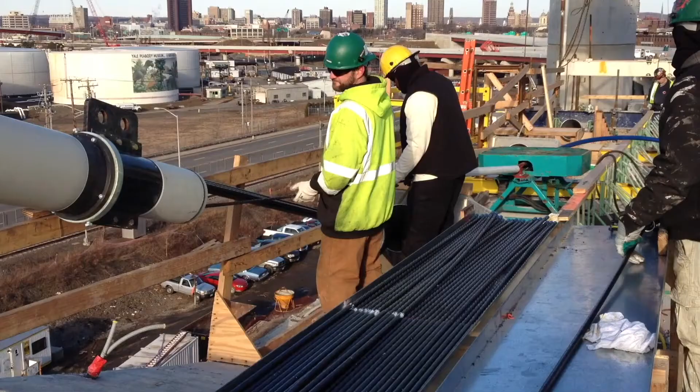Over 10,000 dedicated professionals were involved in delivering this nationally significant signature bridge and highway program. As residents of Connecticut, we should all take pride in the people and partnerships that work to build this world-class project. I hope you enjoy this fascinating account of the new Q Bridge.

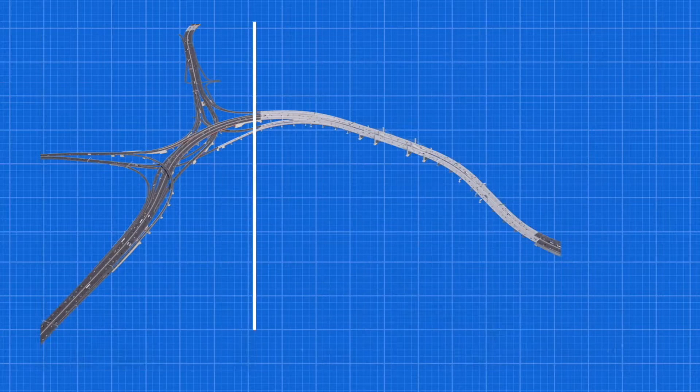This is a story about one of our country's largest, most complex transportation projects, the I-95 New Haven Harbor Crossing Corridor Improvement Program, also known as the Q Bridge Program. Spanning a generation of planning, design, and construction, the Q Bridge Program brought our nation's busiest roadway into the 21st century.

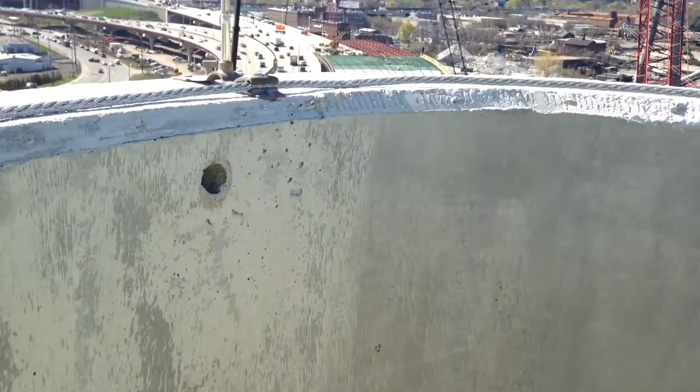The Connecticut Department of Transportation and its federal partner, the Federal Highway Administration, are pleased to offer this historical documentation of the Q Bridge program as told by the people who planned, designed, and constructed the 7.2-mile corridor, which includes the signature Pearl Harbor Memorial Bridge, the Q Bridge. Come behind the scenes and listen to how the program was designed and constructed. It is a story worth telling.

New Haven was first settled in 1638 when the only way to cross the harbor was by boat. It was a time when oystering was a thriving industry. Later, steamboats transported people from New Haven to New York. As the city grew, two bridges were built, one that crossed the Mill River on Chapel Street and another that crossed the Quinnipiac River on Ferry Street.

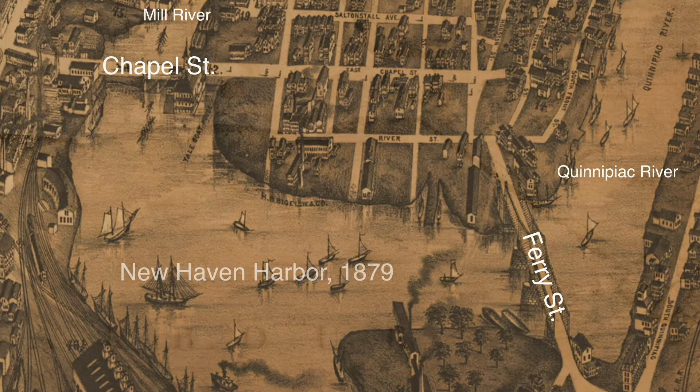Eventually, the first Tomlinson Bridge was built across the harbor in 1797. The present-day Tomlinson Lift Bridge serves U.S. Route 1 and is actually the fourth iteration of this crossing.

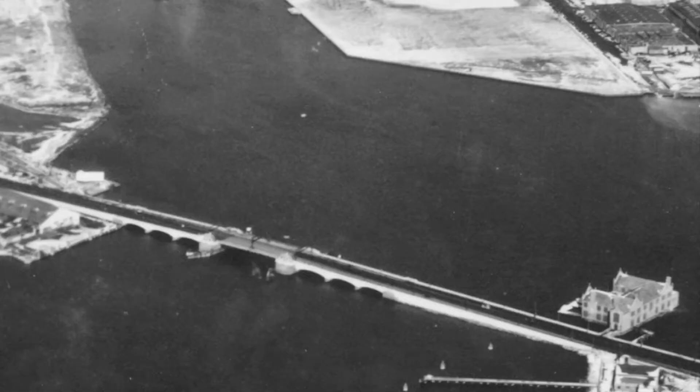After World War II, President Dwight D. Eisenhower was convinced that a national system of roads for automobile and truck transit was necessary for national security as well as for the economic growth of the United States. On June 29, 1956, he authorized the Federal Aid Highway Act, and so began the construction of the interstate highway system as we know it today.

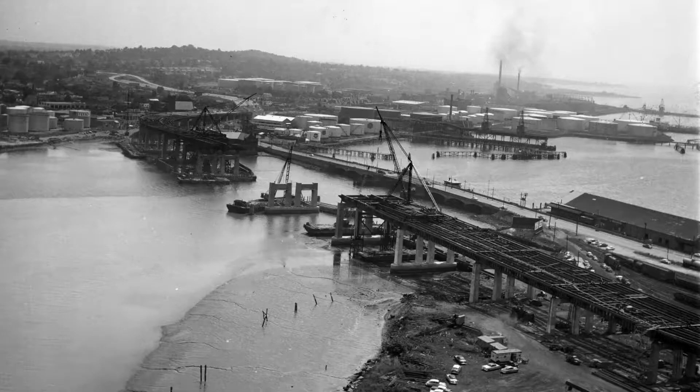2 years later, in 1958, the original Quinnipiac River Bridge was completed, carrying 3 lanes of traffic in each direction across New Haven Harbor. At the time of its completion, it was one of the longest steel plate girder bridges in the nation. With an expected lifespan of 50 years and a design capacity of 40,000 vehicles per day, the original bridge was considered a marvel.

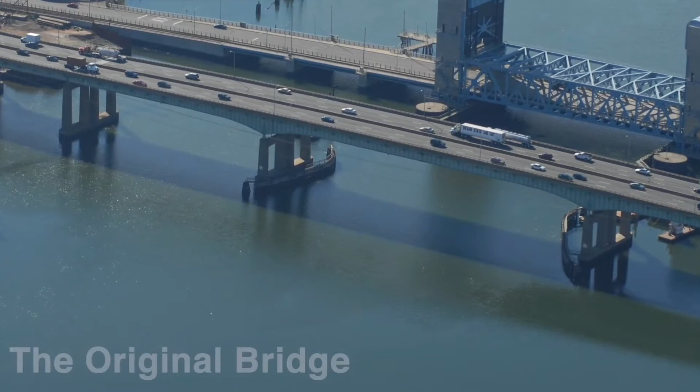However, by the mid-1990s, when the bridge carried over 140,000 vehicles per day, more than 3 times the volume for which it was designed, the Connecticut Department of Transportation took steps to repair or to replace the original bridge. During that time, the Q Bridge was costing more and more money to maintain in a state of good repair. The bridge was old, it was carrying much more traffic than it was ever intended to. We kept having to do projects to repair it.

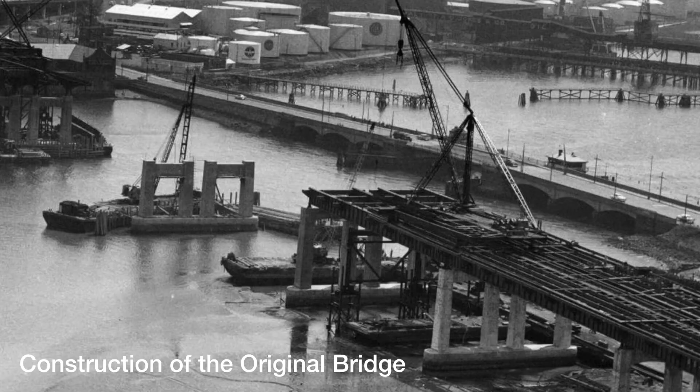The previous bridge, as I understand it, was actually a record setter for its type in the country when it was built. So it was a pretty significant achievement. It lasted a long time. It was too narrow, and it was falling apart. It was just over capacity towards the end and deteriorated to the point where we had multiple emergency repairs that had to be performed. Technical term was structurally deficient and functionally obsolete.

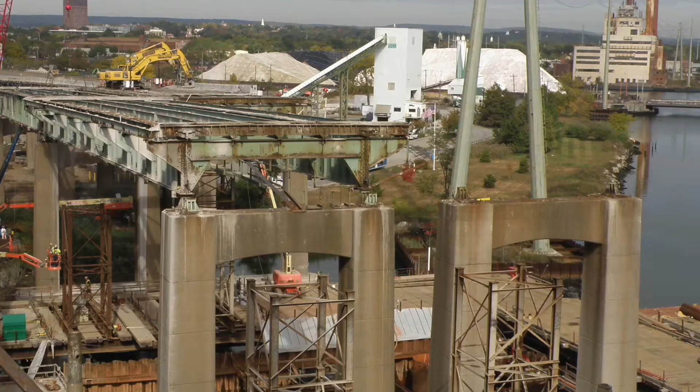So we needed to look at either a replacement or a long-term repair for the bridge, and the decision was ultimately made to replace the bridge. It had to be removed in a very specific sequential order. The contractor hired an engineer to design a demolition plan, and that had to be closely followed.

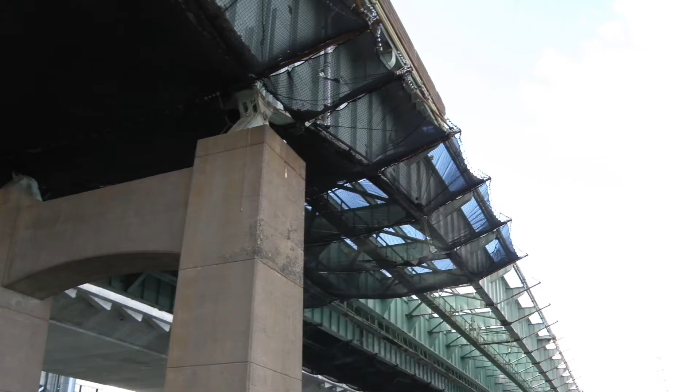We had to perform the demolition in accordance with all the environmental permits from the Department of Energy and Environmental Protection, from the Army Corps of Engineers, to make sure that we weren't dropping material down into the waterway. We had to hang nets underneath to catch anything. We had to coordinate very closely with the U.S. Coast Guard because it's a navigable waterway.

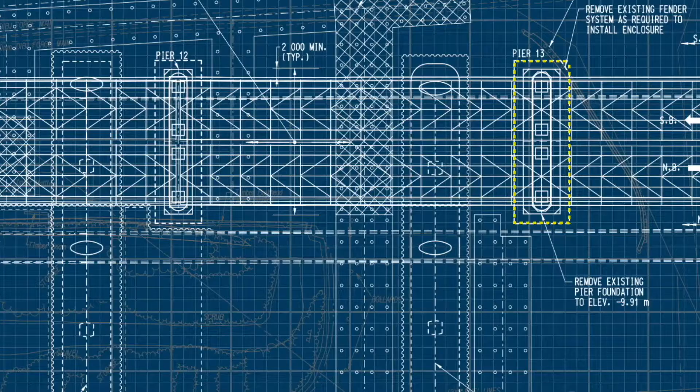We had to keep the channel open. There were a couple of times when we removed the steel over the channel where we had to close the channel for safety reasons. There was one pier, pier number 13, that had to be removed to a significant depth below the waterway because of a widened channel, and that had to be blasted out of the water.

It was important to the city that a signature bridge be built in New Haven. To the casual observer, the Q Bridge is probably the largest architectural feature that you can see in the city of New Haven. When the department was considering what type of structure to put in, the city of New Haven weighed in. They were pretty adamant that they wanted to have a significant bridge, something that was recognizable.

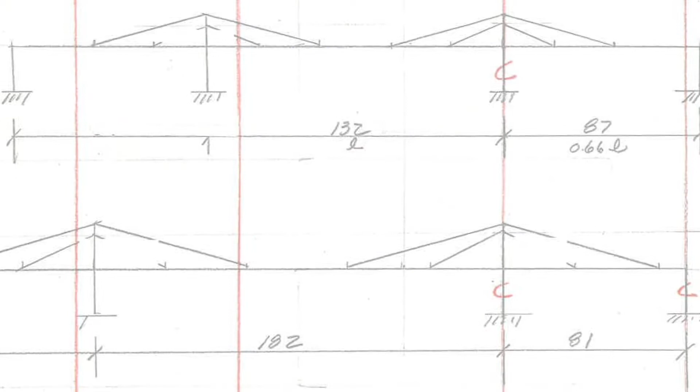The job itself started in 2001, and I was part of the project during the design phase. To be honest, these jobs start out with a white sheet of paper. We had to put a new bridge on top of an old bridge in the same footprint and keep 3 lanes of traffic in each direction. So that was the fundamental challenge of this project.

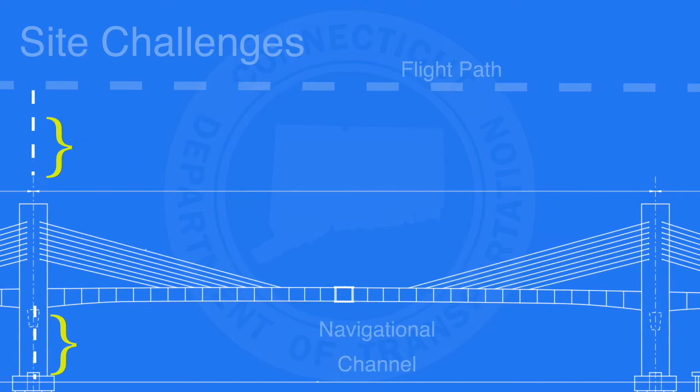There were some challenges to the site. New Haven Harbor is a busy place. There's a navigational channel down below. Certainly need to keep minimum clearances for that. So the bridge depth or the girder depth couldn't go too deep. The elevation of the highway had to be maintained at the midpoint of the bridge. And there's a nearby airport, Tweed New Haven.

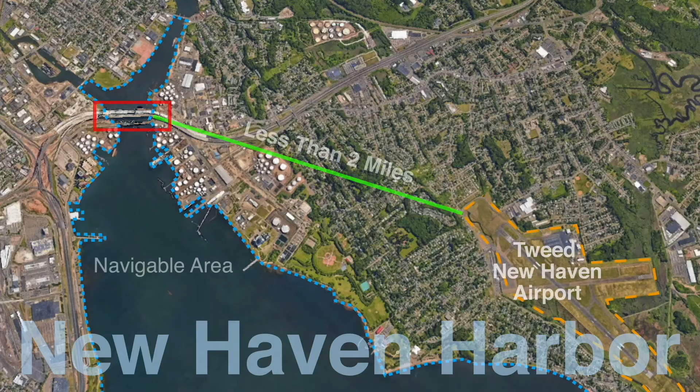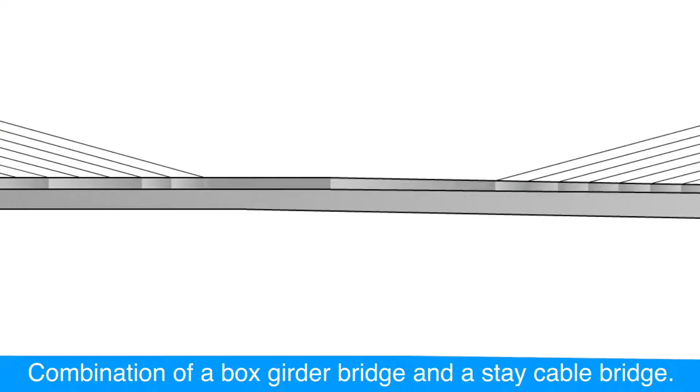So between trying to not go too deep into the navigational channel and not raise the profile of the bridge too much, the designer looked at what they call an extradosed bridge, which was fairly common in Japan at the time. And what basically happened is it pointed towards this new technology of an extradosed bridge that could combine a medium span bridge with a short tower and fit in this thread-the-needle footprint that we had to deal with. We decided on what we call balanced cantilever cast-in-place construction with the form traveler. It's a relatively rare structure type, although it's becoming more and more common.

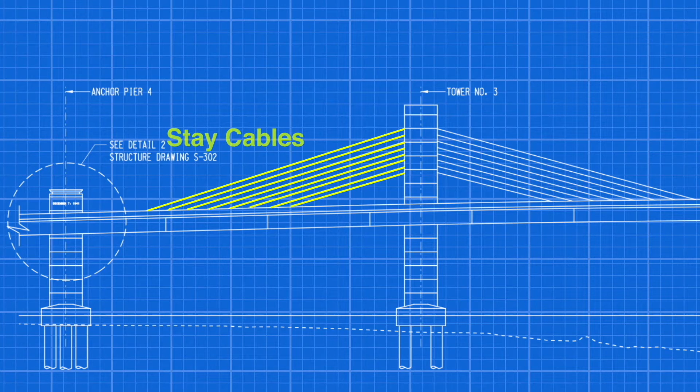Instead of all the load being taken up by the cables, which happens on a cable-stayed bridge, live load is taken by the cables and the dead load is taken by the rest of the superstructure. Basically, it's a hybrid of a stay-cabled structure and a traditional segmental box girder structure, but the towers are shorter, so therefore the stays themselves are flatter, so it's more of an external post-tensioning, but that's the very definition of an extradosed bridge, is to have that inclination of the stays be flat.

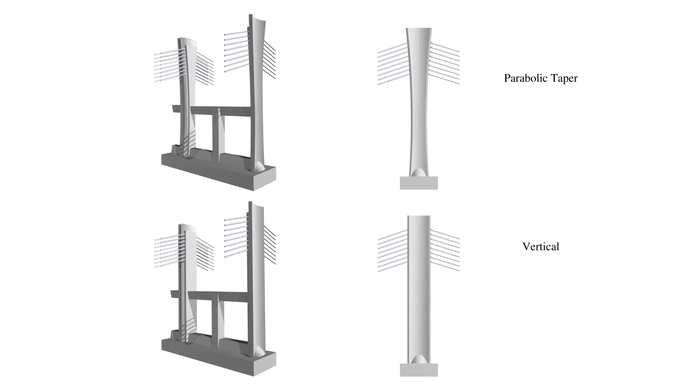This meeting was going to be really important, so I said I'm going to take these hand sketches that I had done and present it to the broad audience. We were kind of confident they liked what we were presenting, and we got a resounding yes to design 2 bridges, concrete and steel, to put out to bid. We recognized that because the fatigue cycles were less, we could raise the allowable stresses in the cable to a higher level, and that has now been adopted by current codes.

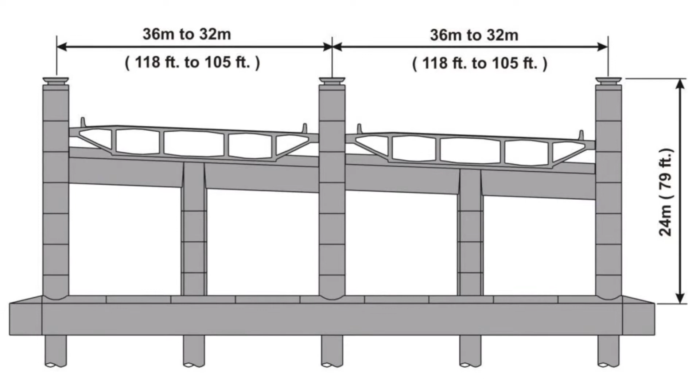Decision was made, yes, we're going to go with an extradosed cable-stayed bridge, and we proceeded with the final design and to build the bridge. I couldn't imagine any other bridge there right now. It just fits.

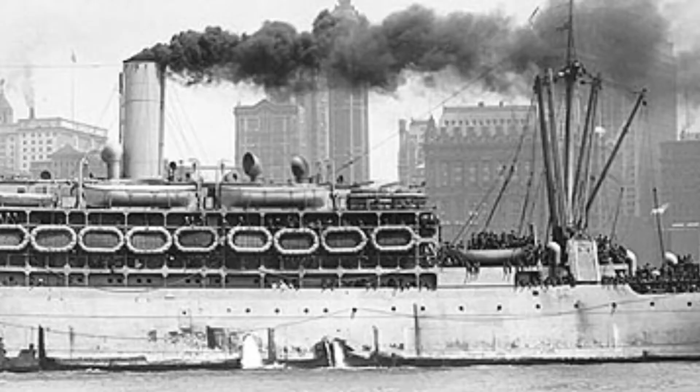It was decided that we wanted this really dignified approach, which is called the anchor pier, but we wanted it to be a monumental approach so that if you're coming from either direction, you know you're hitting something special. It's kind of reminiscent of the ship smokestack, and it gained traction, and I know ovals are hard to build for the contractor. So I developed an oval, but it's really a compound curve made up of 2 circles at the end and 2 circles that connect it. And you can really reinforce those ends really nicely and get good seismic strain.

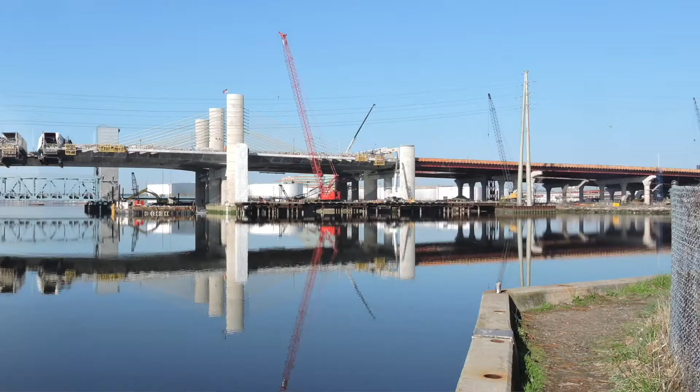The Connecticut State Legislature designated the bridge as the Pearl Harbor Memorial Bridge. The cables, as they come down, sort of look like sails of ships in a way, so it has sort of a nautical theme to it. When you have a nautical theme like Pearl Harbor, you tend to gravitate towards things that are ship related.

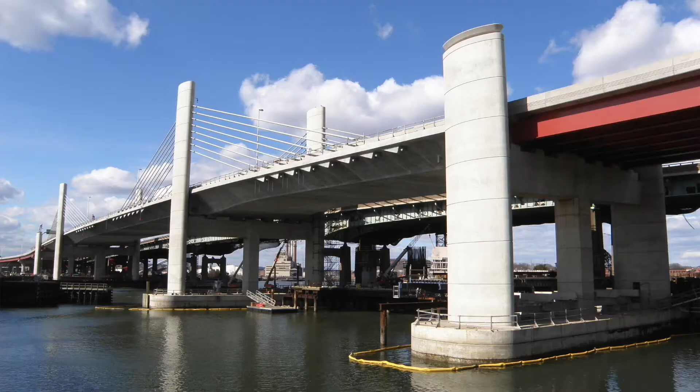Another thing, if you look at the bridge closely, you'll see these reveal lines up and down the tower legs, and if you didn't put those in, it would look too massive and stark. So those really create relief to the eye and kind of make it on a more human scale.

The state of Connecticut wanted to recognize the service of the veterans. My dad was a World War II veteran and landed at Normandy, so I felt kind of a closeness to that ideal. We even went in terms of the size of the lettering. So that captured what we were trying to present.

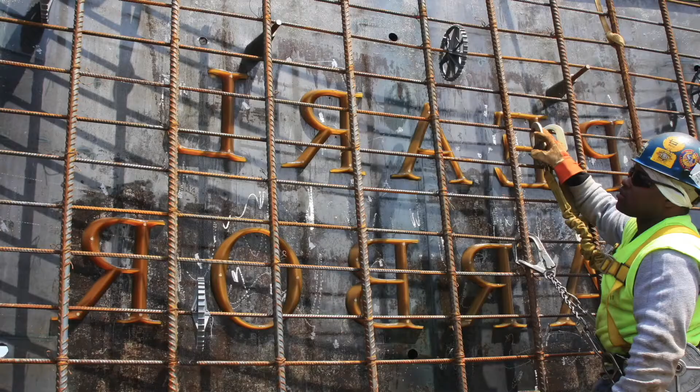The coordination necessary to deliver a bridge of this type with an adjacent highway-to-highway interchange presented a tremendous amount of complexities. Reconfiguring and redesigning the interchange was really key to the success of improving transportation throughout this corridor. The interchange next to it has 200,000 cars. If we didn't have to maintain safe travel for all those cars every day, we could build this project much faster. And of course, the impact of that is it took more time.

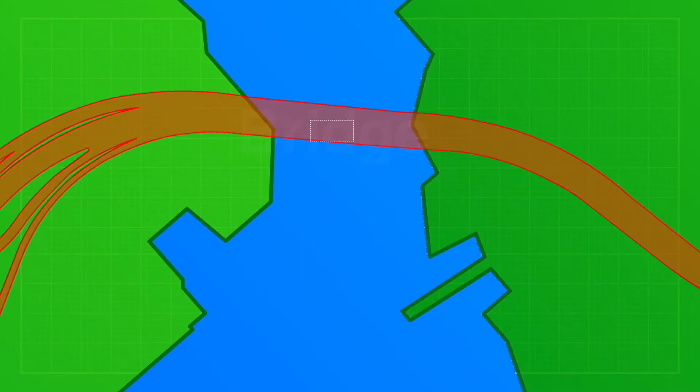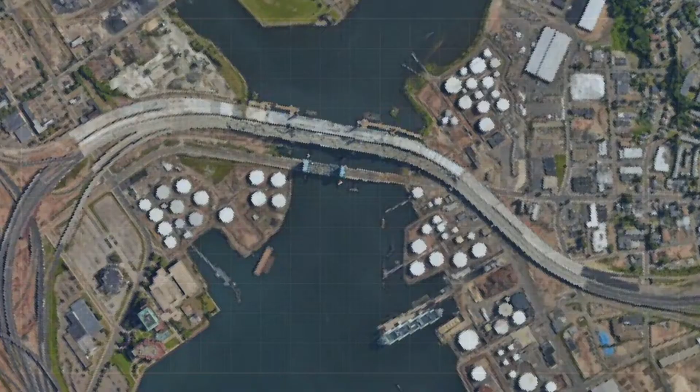So you didn't really see any traffic flow betterment at all during the approach work as much as you did once the Q Bridge and interchange was done. That interchange is what received all the vehicles coming off and going onto that Q Bridge into an interchange highway system. So the approaches on the west side had to be done concurrently with the approaches on the Q Bridge. We need to build the bridge without being in the same footprint of the existing bridge, so we need to keep the foundations away from the existing ones.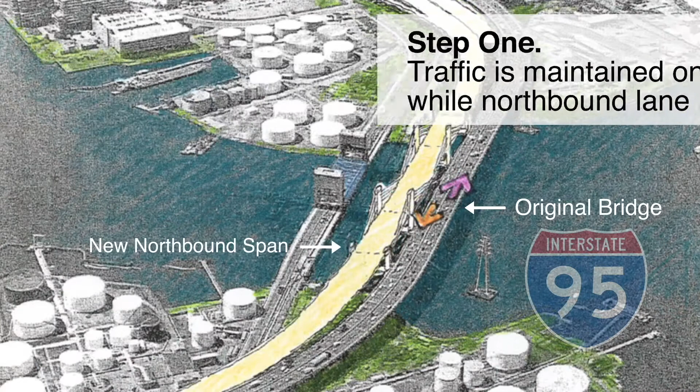So all of those sort of factors weighed in as the design developed and they settled in on the extradosed concept. It was really maintaining existing lanes all the time during high peak hours, and the challenge was to figure out how to get everything built while maintaining those existing lanes, and then have that all work from what we had determined in our construction staging to say that, okay, we laid that out and we could actually see it all happen from up there. It was really, really great.

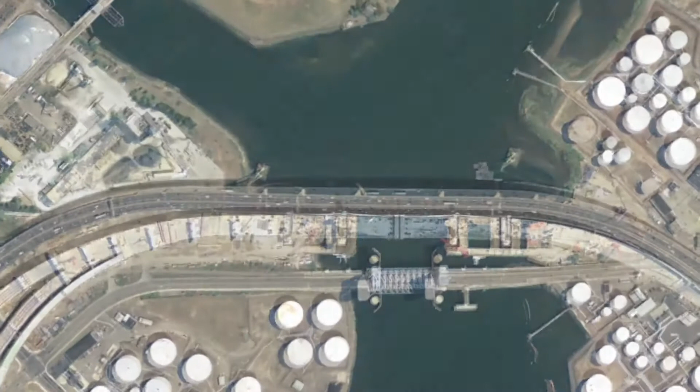We were introduced to the 4D model during the design phase of the interchange project. It's basically a 3D model that you put the element of time and schedule to, which creates a 4D element or product. And we thought, what better place to use it than the interchange? It was a very complicated project as far as staging, reconstructing an interchange within the footprint of an existing interchange. So we thought this 3D, 4D modeling would be really beneficial.

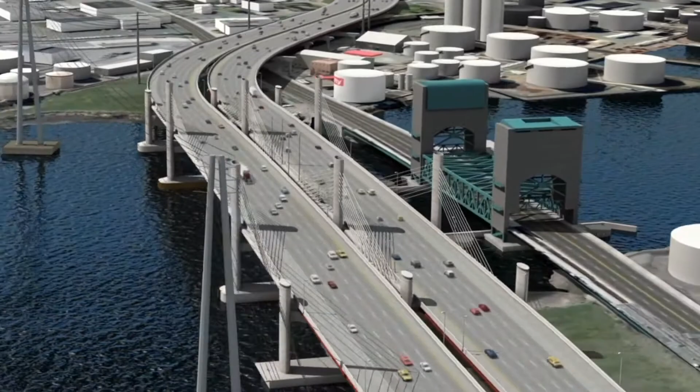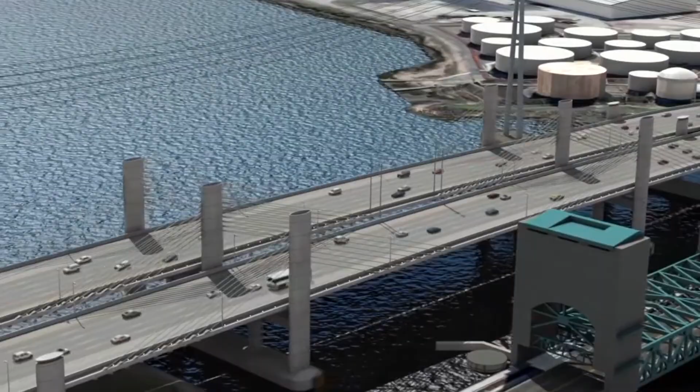We introduced it at a mandatory pre-bid conference, and we introduced this modeling program which showed how the department saw this project getting built. And we also notified the contractor that we would make this model available to the project team. I think we had identified 8 additional conflicts that we didn't see during the design phase for the interchange that we did identify once we put this model into place. So right there we saw the benefit.

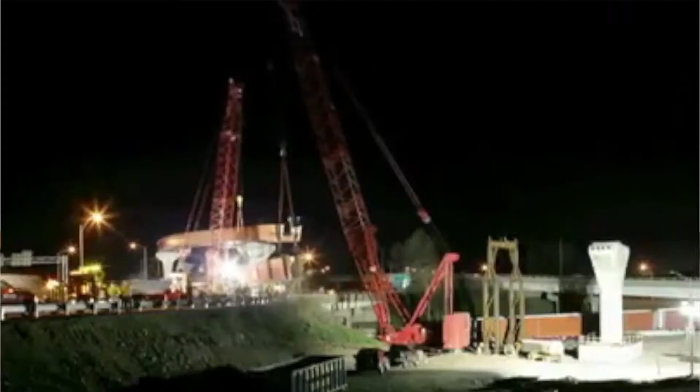And the first time we used it was during the flyover structure that we put in contract E2, where we had to stop traffic on 95 and 91 in order to erect these tub girders. We had 20-minute stoppages to do this, and we used it to capture how it would flow minute by minute. Once the project was underway, we introduced it to the contractor a little at a time, and every time they would have an idea, we'd say, well, let's put it to the model and see how it reacts in the modeling program. And we're like, you know what, maybe this is kind of a beneficial program, and we used it quite a bit after that.

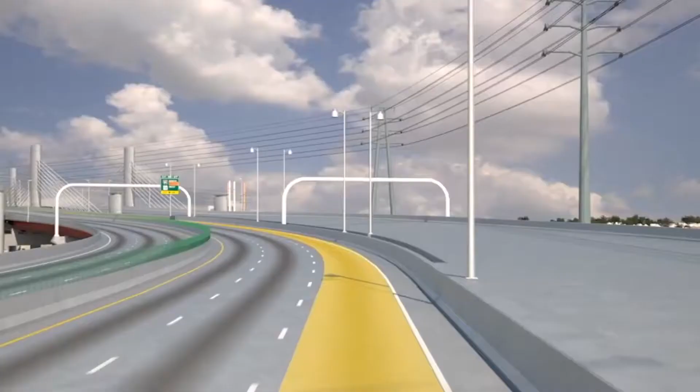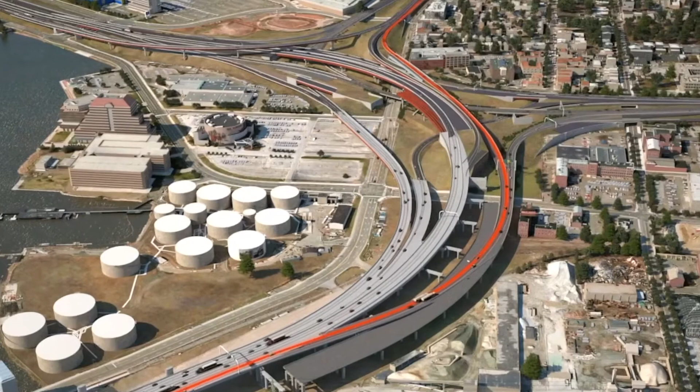There was a structure that we had to demolish 18 inches away from an existing historical building. We used the modeling program and combined it with scanning to try and identify conflicts, and it worked out really well. But we also use it heavily with our public information relations. DOT has some animation to show you what this is going to be like when it's over on Saturday morning. We have it as part of our presentations. We use it on the website to show people stage shifts and things like that.

But when you put a visualization type of model to it and show what the shift is going to be, it really gets the traveling public to get a better idea of what's happening.

Workers broke ground for the Pearl Harbor Memorial Bridge main span in 2010, building on a foundation system begun in 2008 under a separate project. From the beginning, the construction program demanded the highest level of professional cooperation and creativity from many public and private sector contributors. We worked off of temporary trestles, so you had to design those trestles to withstand the loads of this very large and heavy construction equipment.

The main span is about 515 feet across the channel, so we couldn't interfere with any of the channels because of the navigation. But between the shoreline and the tower pier, that's not a navigational area, so trestles were necessary between the shoreline and the tower piers.

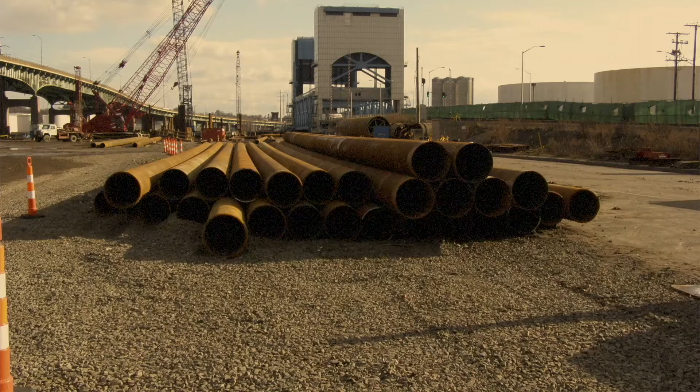The trestle was founded on 24-inch pipe piles that were driven down to bedrock. Bedrock widely varied from one side of the channel to the other. It was only 40 feet or so down on the east side of the channel, whereas it was about 180 feet down on the west side of the channel, so it really dropped off significantly. So the pipe piles were then driven to bedrock.

There was a girder steel superstructure that was built on top of the pipe piles, and then timber decking went on top of that. The contractor used concrete decking at heavy lift areas and turn areas of the trestle.

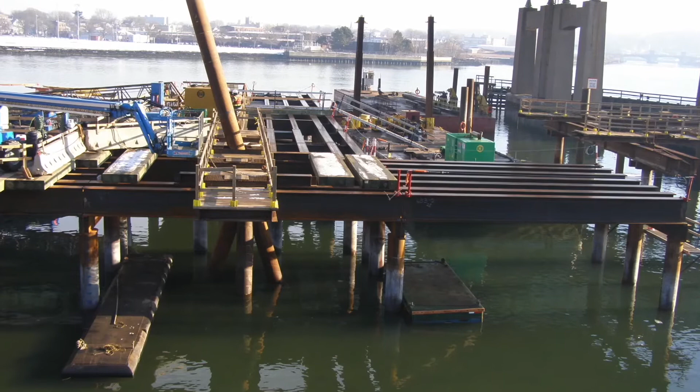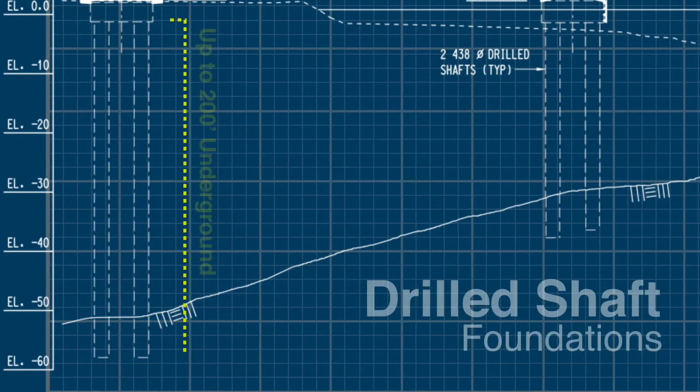The foundation or the supporting structure of the bridge is based on drilled shafts. And a drilled shaft is a circular column of concrete that is socketed into the rock below. And so that force from the bridge transfers from all the way down in the towers into the foundation to the rock below.

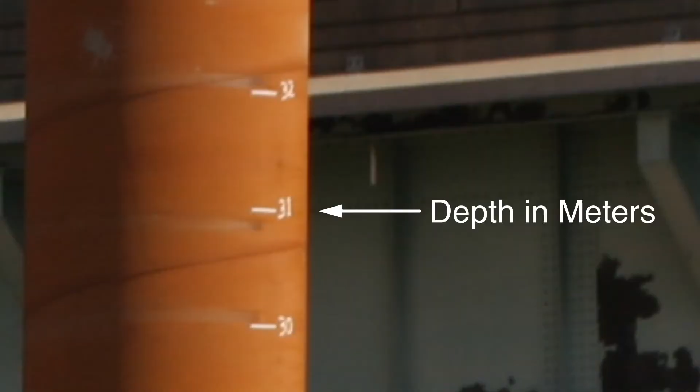In particular, we used something called an oscillator. What an oscillator does, it takes a steel tube, which is our steel casing, that becomes the form, if you will, for the drilled shaft, and that rotates back and forth, not fully in a circle, but oscillates back and forth and basically screws that tube into the rock below. And then it will excavate out to the rock, to solid rock.

And then what we would do is fill up that steel casing with concrete and reinforcing steel, and that would form our drilled shafts. You're digging out what are called drilled shafts, which are basically reinforced concrete piers that go down all the way into the bedrock.

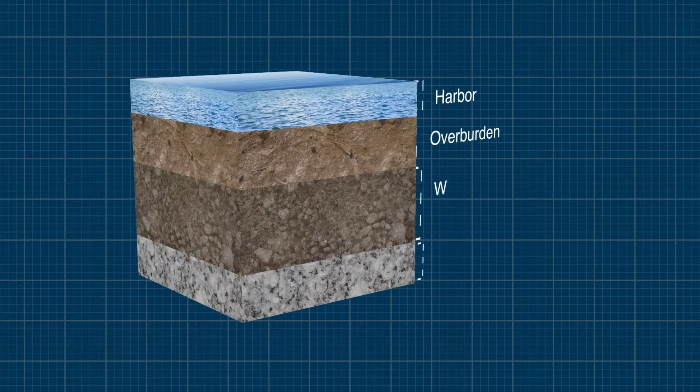So they determine the elevation of what we call weathered rock and then competent rock. And then that information is brought to the designers, so then they determine where competent rock begins and how far you have to drill the drilled shaft casing. Some of the foundations are as deep as 200 feet down below ground level.

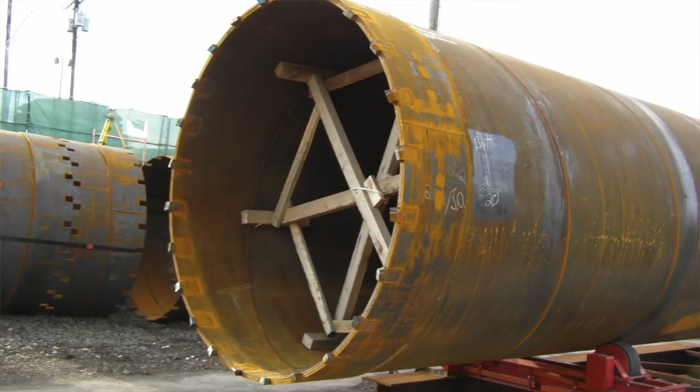We have special drilling equipment that sits on temporary supports. You can't really see what you're doing because you're down underneath the water. That can be a very challenging process. We had a sleeve of steel that was 3/4 of an inch thick, that every time they would auger out, that casing would follow through into the hole.

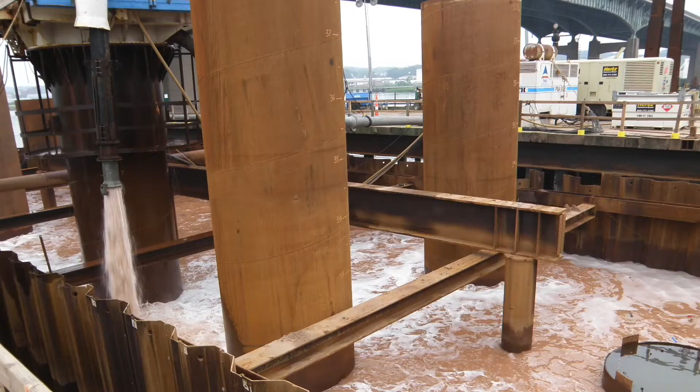Then you have to seat it into rock to make sure you don't get any washouts. And then you bring different equipment in to excavate the rock socket. The rock socket goes anywhere from 10 to 30 feet down into bedrock. Different types of equipment were used with that, some with water pressure, some with hydraulic energy to make that happen.

Once the rock socket is put into place, it has to be totally clean so you get a bond between the concrete and the rock. They use various methods to clean it out to make sure it's perfectly clean before you proceed any further.

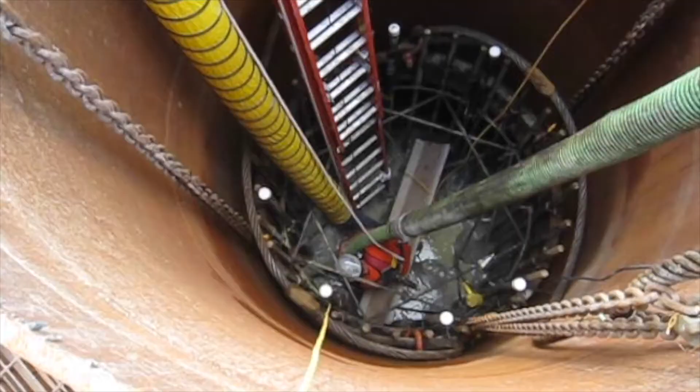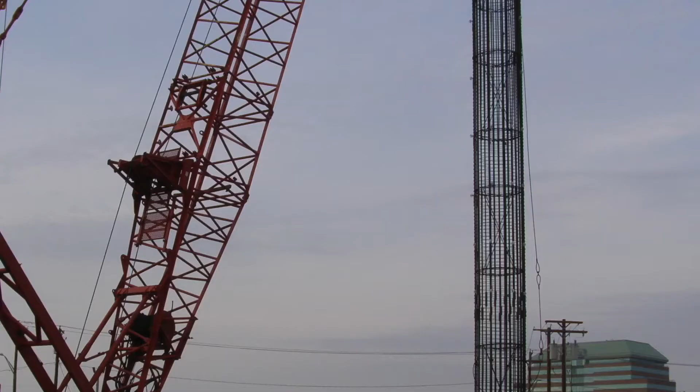You have a prefabricated rebar cage. The rebar cage has CSL tubes. CSL is for crosshole sonic logging to check the integrity of the shaft after it's poured. After you put the rebar cage in, then you do underwater concrete. It's a tremie method of pouring concrete, where you start at the bottom, you pour the concrete in the water, and you proceed upwards. So we did that with all the shafts on the entire project.

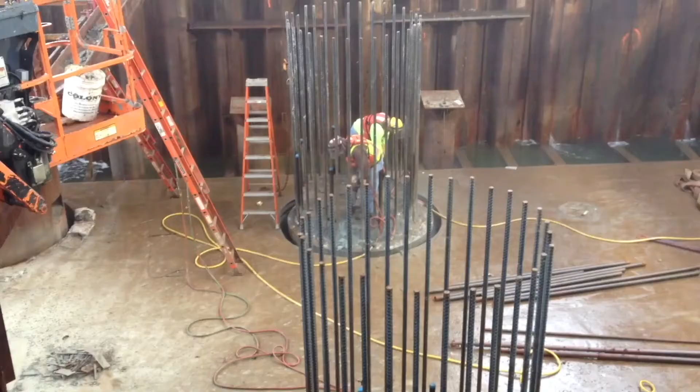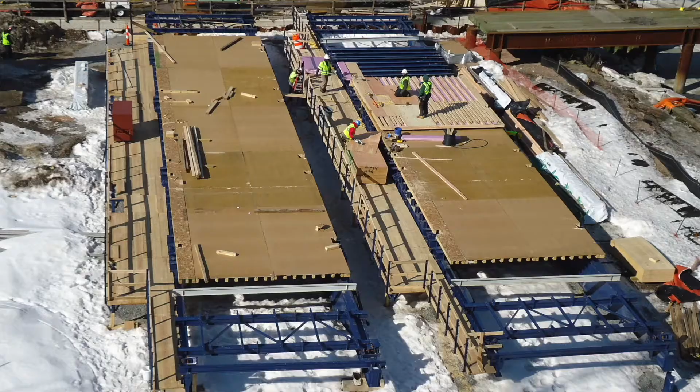At the top of the tower piers, the first segment on each side of the tower pier are built under traditional construction methods, and they serve as a platform for the rest of the work. So first you build the pier tables at the top of the tower piers, and then the form travelers can be used. And a pier table was a very large piece of concrete, about 40 feet long, and that allowed us to start as a starting point for the cantilever process.

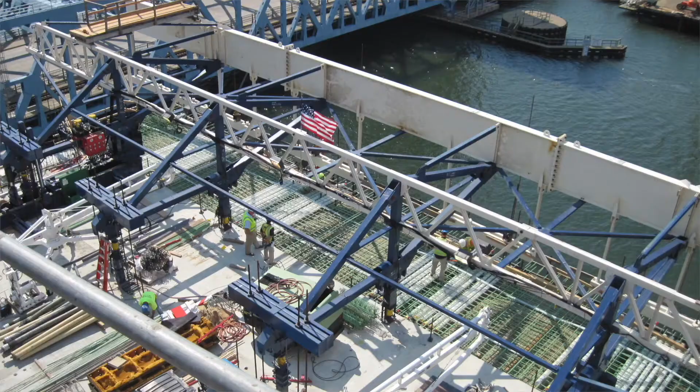Because we had a concrete segmental bridge and it was cast in place as opposed to a precast, form travelers were the conventional method that most of the contracting community would use to build a segmental bridge. We had 4 form traveler assemblies being used concurrently, so there's 2 at each tower pier. So what you do is you proceed out from the tower pier with 1 form traveler towards the middle, and then the next pour will be towards the back or towards the anchor pier.

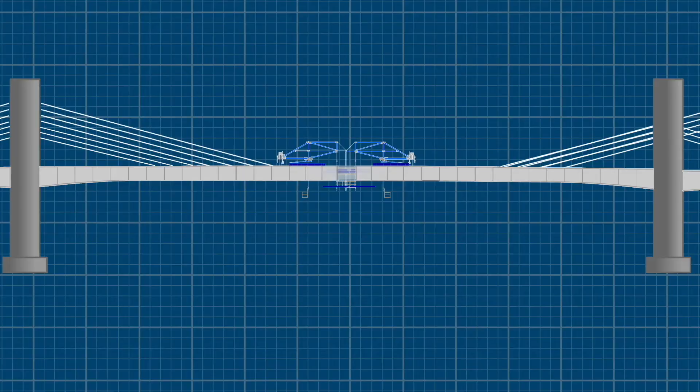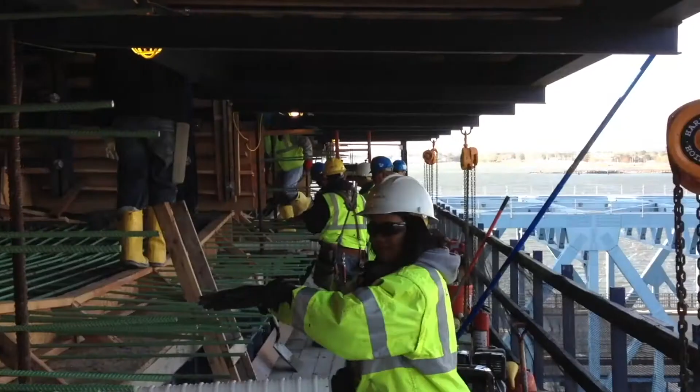Form travelers enabled us to pour about a 14-foot long section of superstructure at one time. It's a series of trusses and steel frames that basically is a formwork and supporting structure for the wet concrete. So as we had cast these segments up in the air, this form traveler would hold the wet concrete and be anchored to the previously hardened concrete.

It's a constant process. So every time we pour a new segment, we're checking before the pour, we're checking the geometry after the pour, we're comparing notes with the contractor to make sure they're getting the same numbers that we are. And it's just a constant, ongoing process the entire time. And as you get closer and closer, it gets a little nerve-wracking because you want to make sure that you're coming into the right spot. And sometimes the bridge doesn't behave quite like the computer models say.

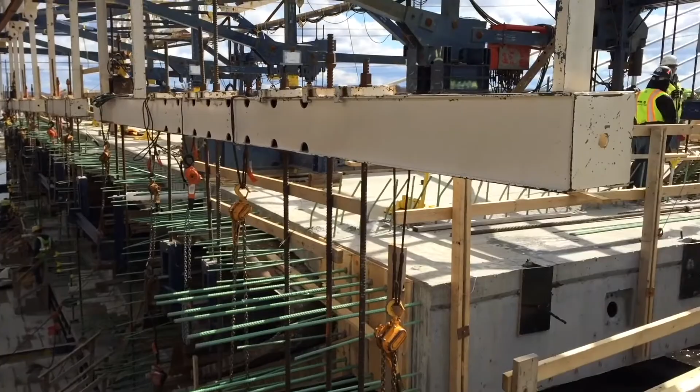We're always checking geometry to make sure it's headed straight and it's at the right deflection. We were within 1 to 2 inches in elevation of where we needed to be when we did that, which is very easy to make up. So it was very successful in that regard.

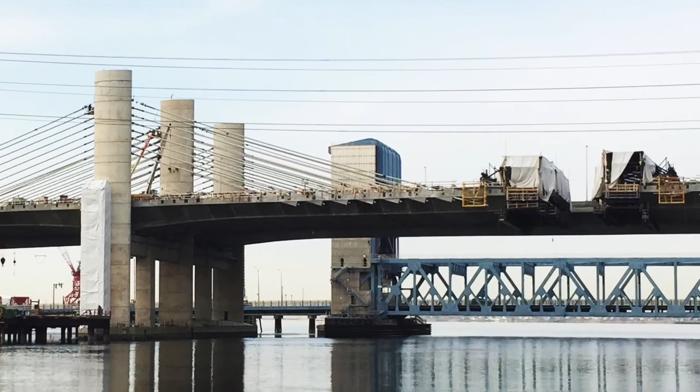And the trick is that every time you cast another piece of the bridge, another segment, you have to make sure that the geometry of that overall length of those cantilevers and the geometry of the next segment that you're placing is such that when you end up coming together with the cantilevers from the other side of the river, that they meet in the middle properly. In the end, when you come in close like you were expecting to, that's a great feeling.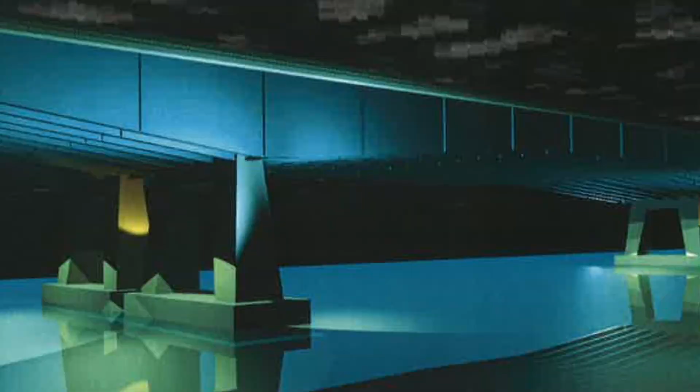When this bridge was designed back in the early 2000s, we knew that we were going to have a signature bridge. We had decided on using aesthetic lighting to light up the towers, light up the cables. Pretty common in a lot of large bridge structures. And the key benefit of going with LED lights is you can change the colors. So the original stakeholder group did have some concerns with changing colors on a memorial bridge.

Birds could fly around the bridge because they're attracted to large amounts of light. So from an environmental standpoint, they thought that using the color would be a better option and we could use softer hues during the migratory bird season. The LEDs, I think, really showcase it based on some of the feedback that we've gotten from the public to date. They really appreciate being able to kind of change it up, use some red, white, and blue on July 4th or that kind of thing, and I think that people really enjoy it.

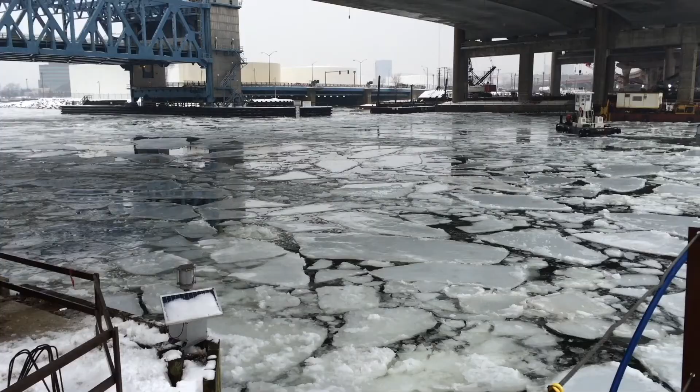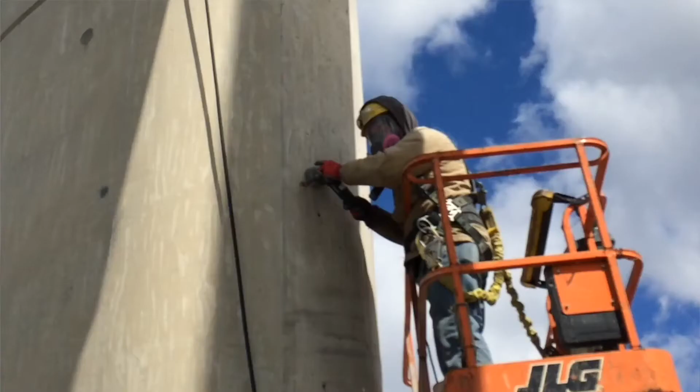You've got people that are working out there in all kinds of weather. I mean, from freezing cold New England winters to hot and humid summers and everything in between. Sometimes it's windy and sometimes it's raining. And well, I think it was a real collaborative effort between all the parties involved. Certainly the Department of Transportation took the lead on that. They had to keep plugging away day or night through all the months of the year, through the winter months, and we had some really rough winters during that time frame.

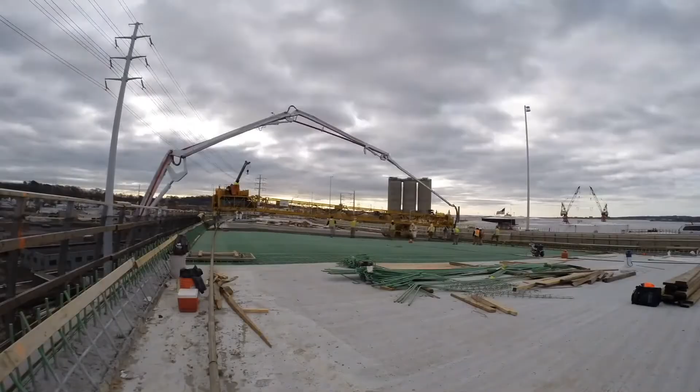It's a very big sense of accomplishment. This job is a very big success from the perspective of everyone working as a team. And again, that could come across as a cliche sometimes, but everyone worked together for one common goal. Everybody out there takes a lot of pride in what they're doing.

So, whether you're a laborer, whether you're an iron worker, you're an engineer, an inspector, I mean, all the way up and down the whole range, you've got people out there that feel like this is an important project, they understand that, and they put a lot of time and effort into it. So the work ethic is pretty amazing.

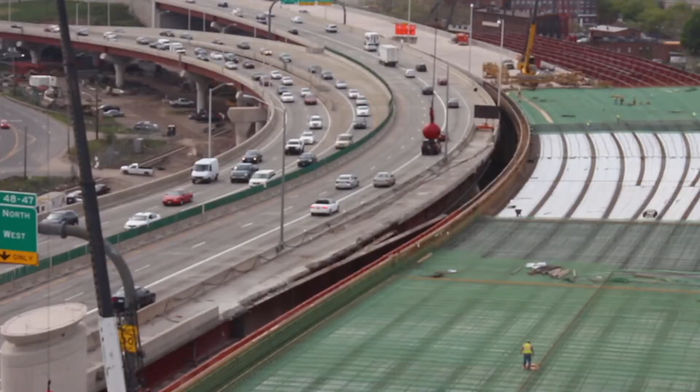We can always come back and drive across the structure and say, hey, I had a hand in that, or we built that. We got the bridge open when we said we were going to get it open. We met or exceeded all project milestones as far as the opening of the northbound bridge, the opening of different ramps, the opening of the southbound bridge. And we were able to do that while keeping under the project budget, which is really quite an accomplishment. So that certainly is something to be very proud of.

When you saw the way things were coming together, it made you even more proud that we were doing a good job. It's extremely gratifying to see a project that you worked on during design development, then you helped oversee it through construction, and now as we near completion, it's extremely gratifying.

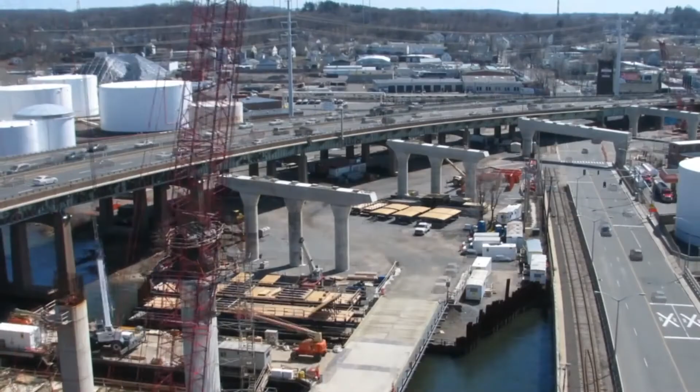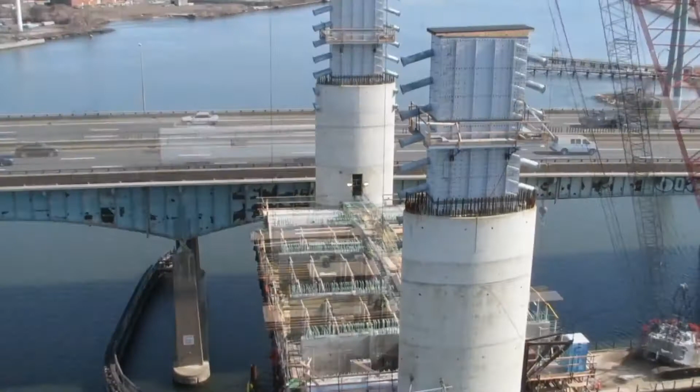We did a project of this size and magnitude and notoriety, being the first of its kind constructed in the United States, bringing in that sort of level of national exposure and national experience into it, and really assembling a team from around North America to come in and build this job with everybody of the mindset that we're going to get this job done, we're going to get it done on time, and we're going to try and get it done within budget, with a quality structure.

I think everybody had a stake in the project. And I think that's really probably one of the key pieces to the success. Just watching a team work like that to make a success of a large project like this, and to really sit back and watch and then learn from and then carry forward into any sort of future projects.

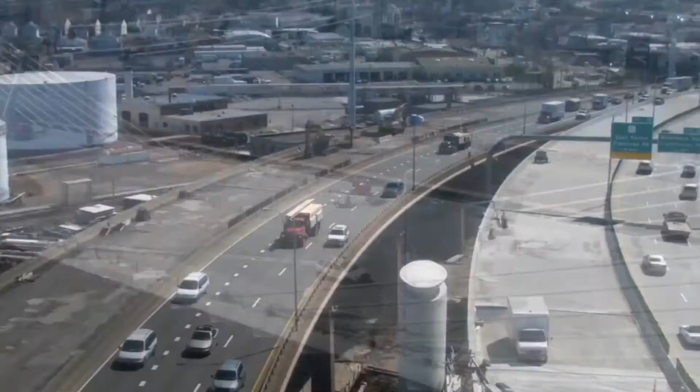One of the major drivers with the project was schedule. It's always been schedule driven. We wanted to get the job done as quick as we could, but reasonably. The contract itself was very long. It was 6.5 years. The scope of the work was enormous. And it had to do with the right people in the right places making the right decisions when they needed to make them.

We all came together as one for this one amazing project, which I call a career project, that I'll carry with me for a long, long time. It was a really great thing to happen.

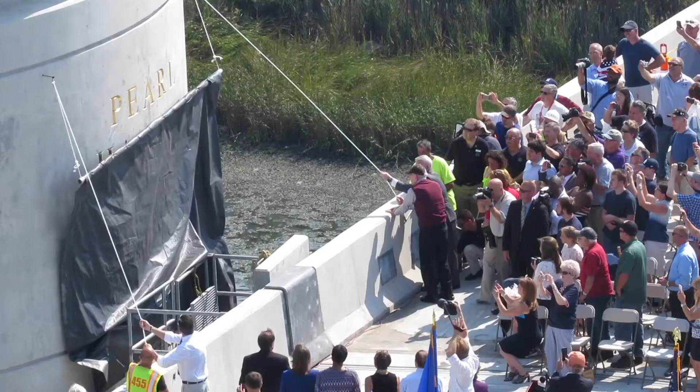It was a pleasure to work with a high number of talented people, from the state and the Federal Highway Administration to all the consultants and the contractors I worked with. But the thing that really struck me a couple of times during the course of this contract was the honor to meet and talk to the Pearl Harbor survivors. These are members of our greatest generation. This is my dad's generation, and I couldn't have been prouder to be part of a project that built a bridge in their honor. This is a great project.

We've learned a lot of lessons about how to get these things done and how to rebuild our economy. This is the demonstration project. There are many, many, many more to come in the coming years. It's got a lifespan of 100 years. So when your grandchildren are having grandchildren, they will be here riding over this bridge for the next 10 decades. So when you think about that, we're going to actually be maintaining our bridges in better conditions for the next few generations.

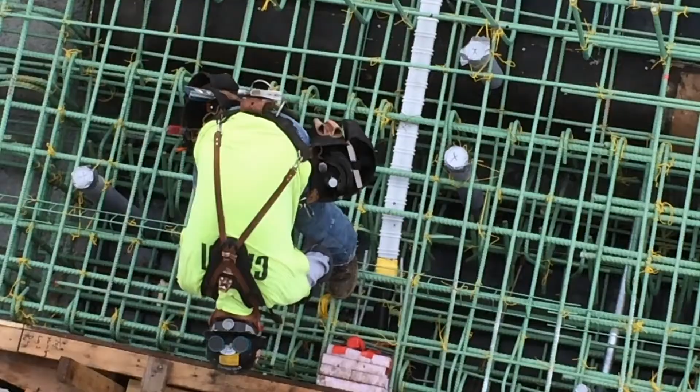It is, as the governor has pointed out, the largest project in the history of the Connecticut Department of Transportation. And in the end, almost 9 out of every $10 spent on this project came from federal funds. It's also an example of what is possible if we commit to investing in infrastructure, if we begin to be a nation again that builds and not just consumes.

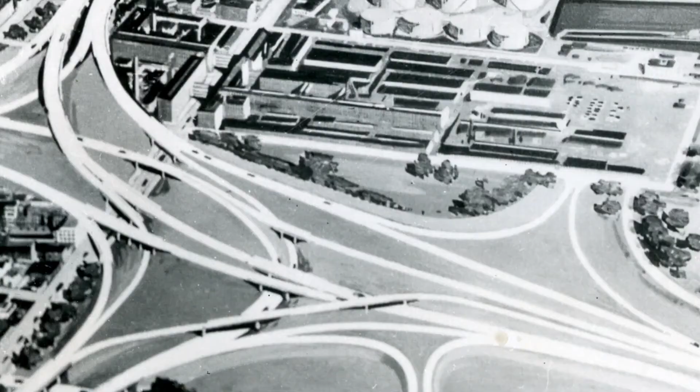It's what it symbolizes and what the future of our economy is. This is an anchor of that, jobs, putting people to work. So many things that really capture what the U.S. has been all about. The Q Bridge program takes us from the past to the future, linking what came before to what will be. Thanks to the dedicated efforts and talents of many hundreds of people, that future shines brighter today.